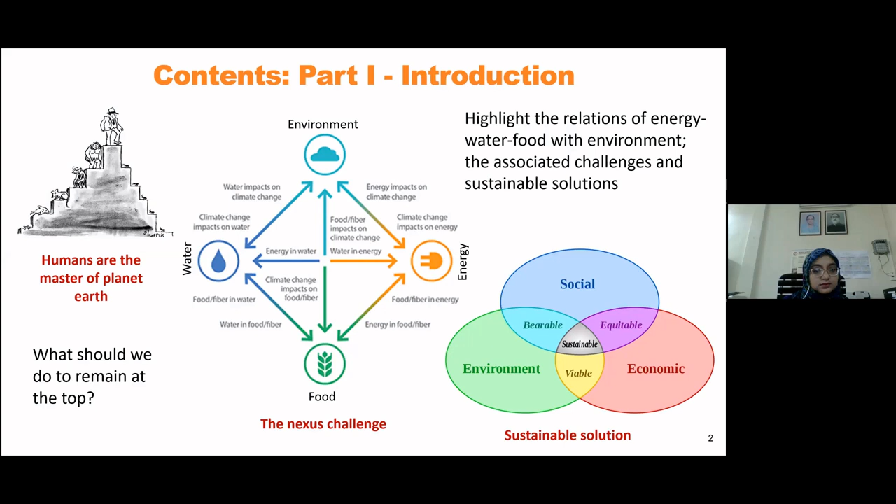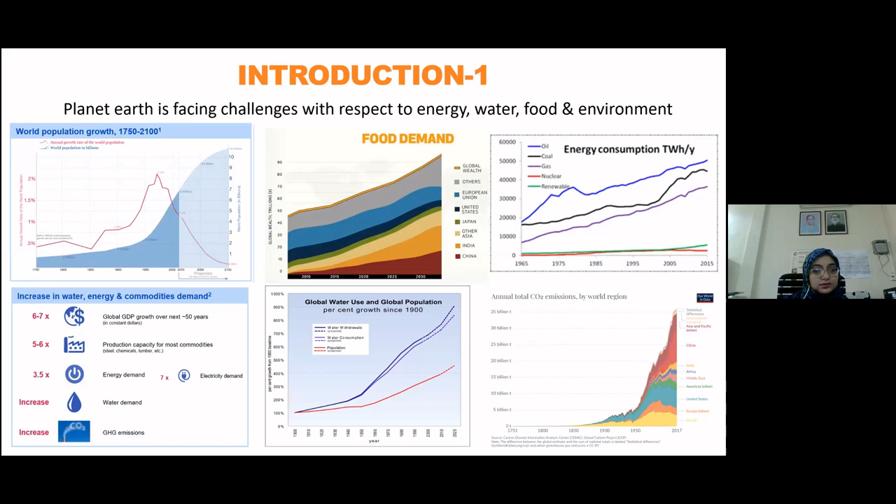But what does this increase of temperature mean? These are all data, not predictions, just raw data collected by different organizations. And the next pictures are real pictures, not manipulated pictures.

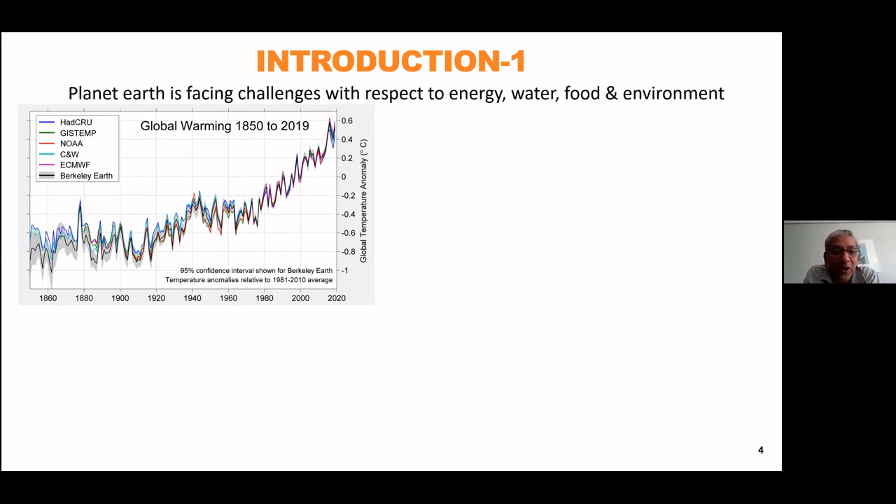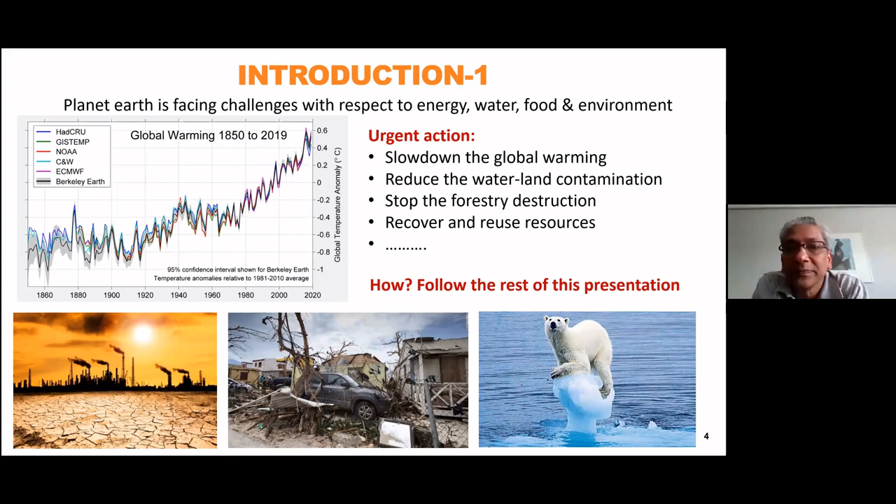The question is how? And if you're interested in this, then the rest of the presentation you can follow, and I will show or discuss how, as chemical engineers, we can contribute to this. So now I will talk briefly about the problem and the analysis.

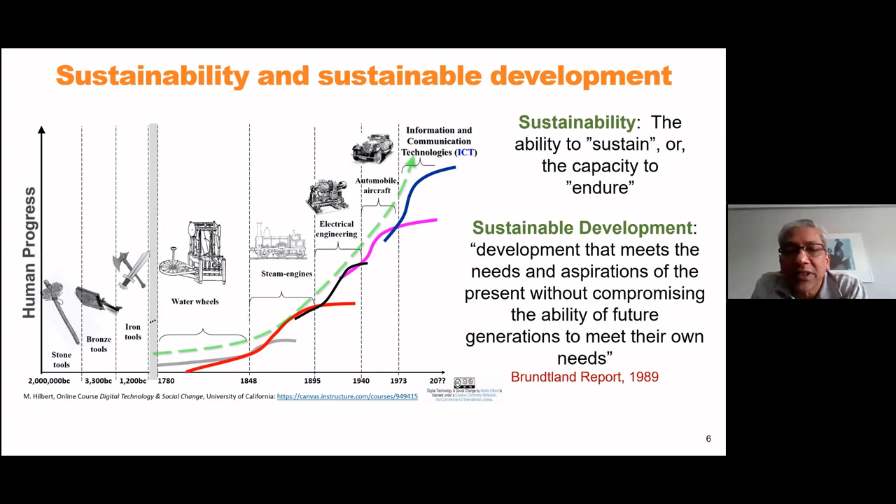But whatever we do, whatever technology we develop, it also has a constraint. This was actually based on a report from the United Nations in 1989, which says: development that meets the needs and aspirations of the present without compromising the ability of future generations to meet their own needs. So we should not just develop technologies, we also have to think of whether that is sustainable with respect to this.

And what I would say is that if one looks at all the developments going on, very few of them, or many of them, do not satisfy that. If you want some examples, you can ask me at the end of the lecture and I will give you examples. So this is something serious because it is there, but why aren't people following it?

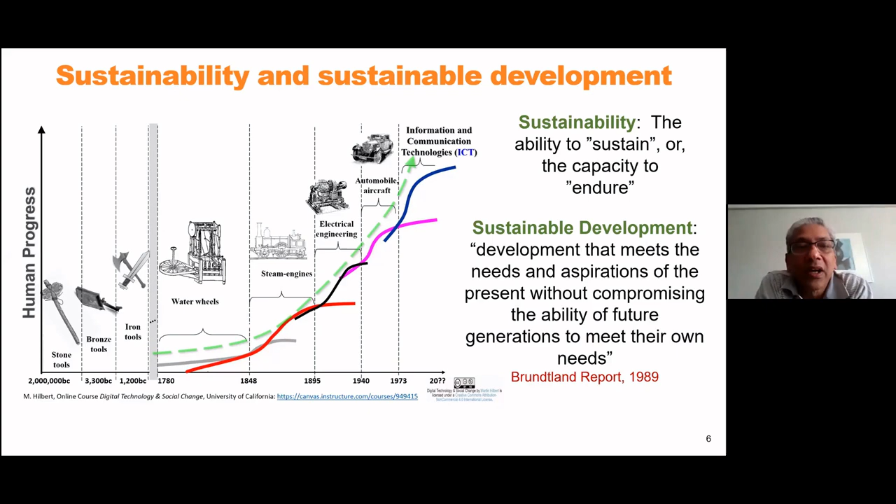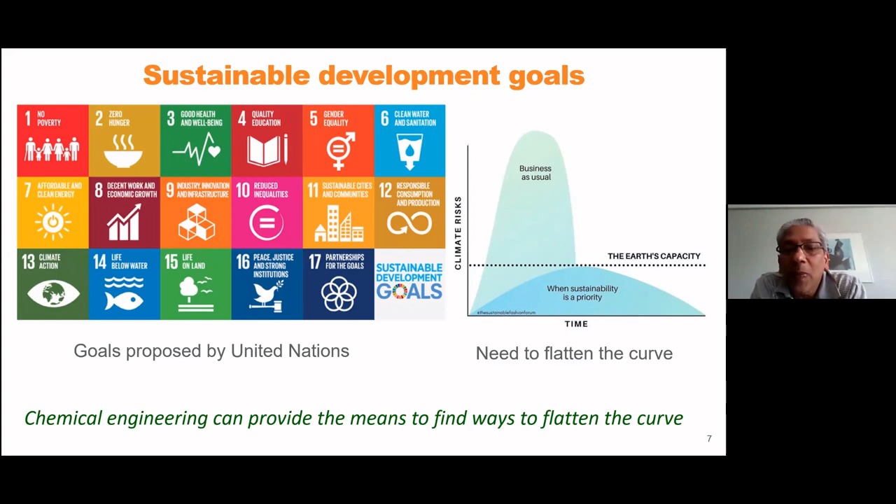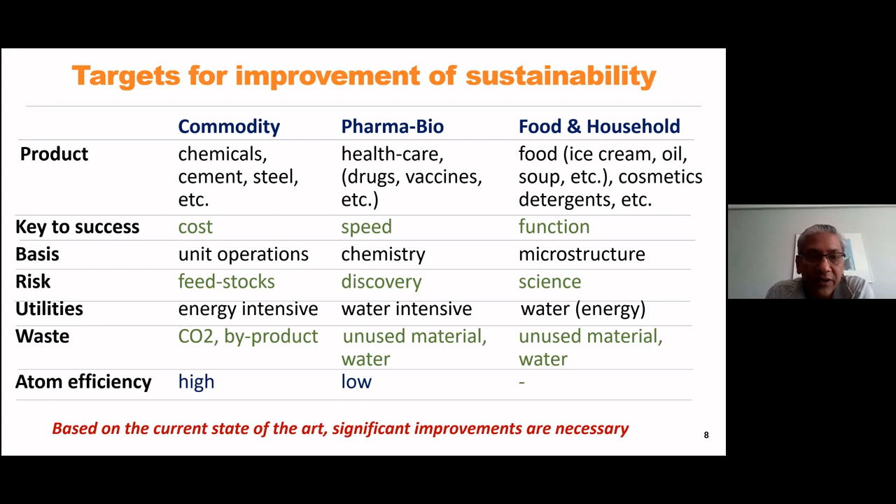Let me now explain a multi-layered view of chemical engineering. At the core, what we say is that chemical engineers, or chemical engineering, is all about converting resources to products that society needs. And a process is a typical process that chemical engineers would design based on the fundamental principles that they would learn.

Like thermodynamics, reactions, separations, transport phenomena, and so on. Based on these fundamental principles, they will design, build, control, operate. But the resource conversion is not 100%, so there will also be wastes. That's the core—every chemical engineer would be expected to know this, but is that enough?

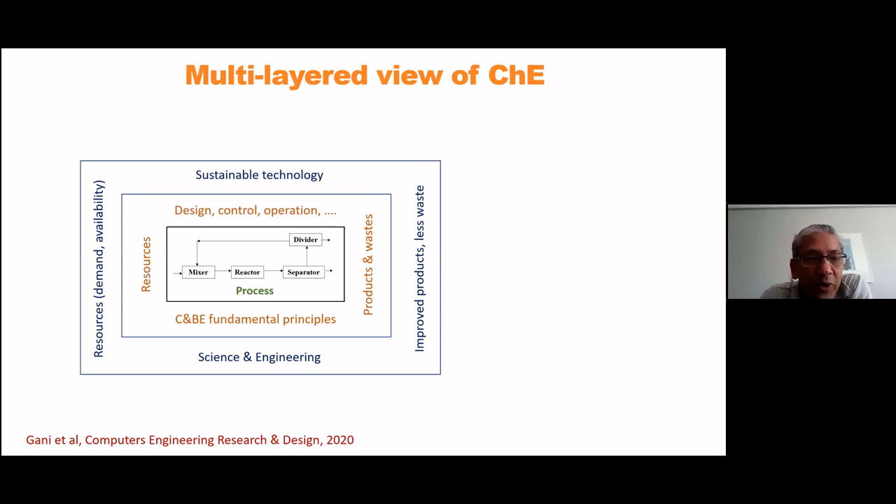That is not really enough, because we are not talking about the availability of the resources. We are not talking about the demand of the resources. And we are not talking about whether the products are improved, whether the waste can be reduced. So if we take all of this into account, we will get a sustainable technology.

To get the sustainable technology, we need more advanced fundamental principles. That's where we need to combine science and engineering. But is that enough? And that's why in the multi-layered view, the final layer is that we want to get the optimal products, the lowest waste, the controlled environmental impact, and so on.

In terms of resources, we need to look at location, type, demand, availability, recovery, and so on. The final result would be a sustained society, sustainable development in terms of industry, institutions like BUET, and all this.

But in order to do this, we need integration of ideas, disciplines, data, and so on. And I think chemical engineering is already built in such a way that we can glue all these disciplines and ideas together to find a solution.

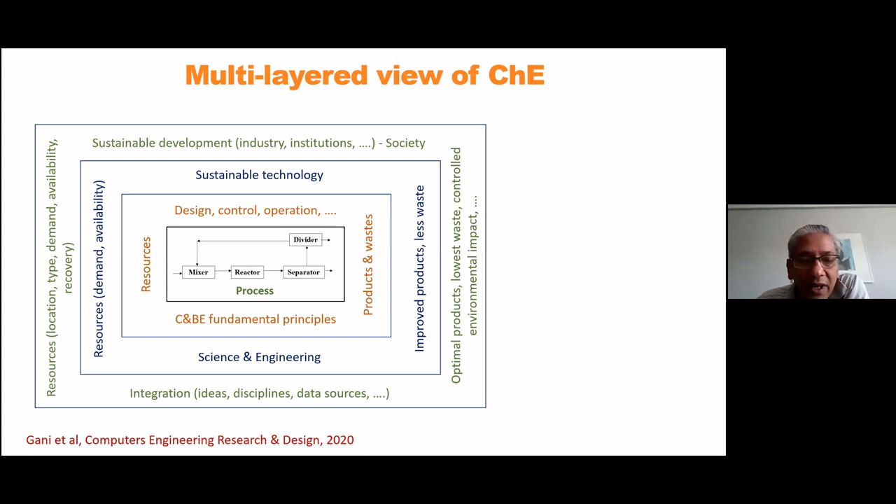If you're interested more in this view of chemical engineering, please look at the publication which came out this year, early this year, in Chemical Engineering Research and Design.

So what would be the contribution of chemical engineering? Problem identification. We can identify the system, which can be process, which can be product, versus their impacts, which resources to use, and so on.

We can evaluate alternatives. Are those alternatives sustainable? Which one to select? This requires development of methods and tools.

In order to do the evaluation of sustainability, we need to calculate the measures of sustainability. We need to do the sustainable process design, the modeling, the database, all of these, and finally mitigation or management.

In addition to management of CO2 emission, water, energy, and so on, I would say that we also have the responsibility to educate and train the general public on the problems that we are facing and how to solve them. And at the same time, if we cannot make the decisions, we need to influence the decision makers, which is very, very important.

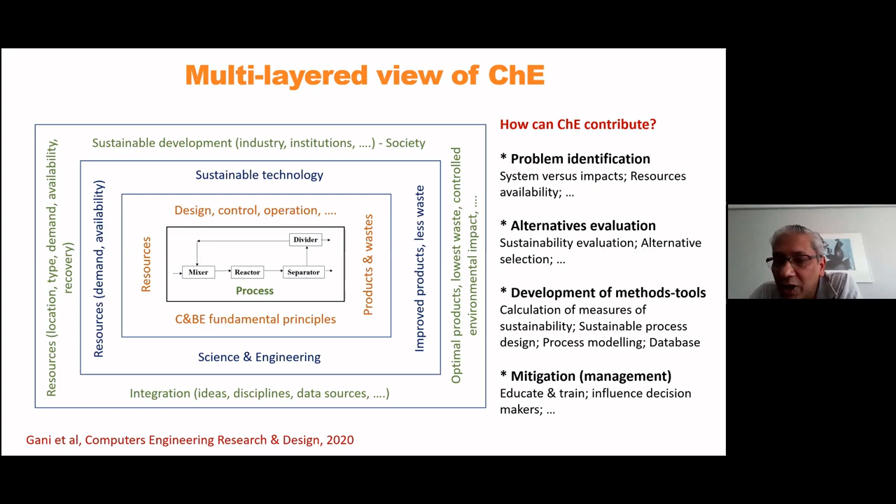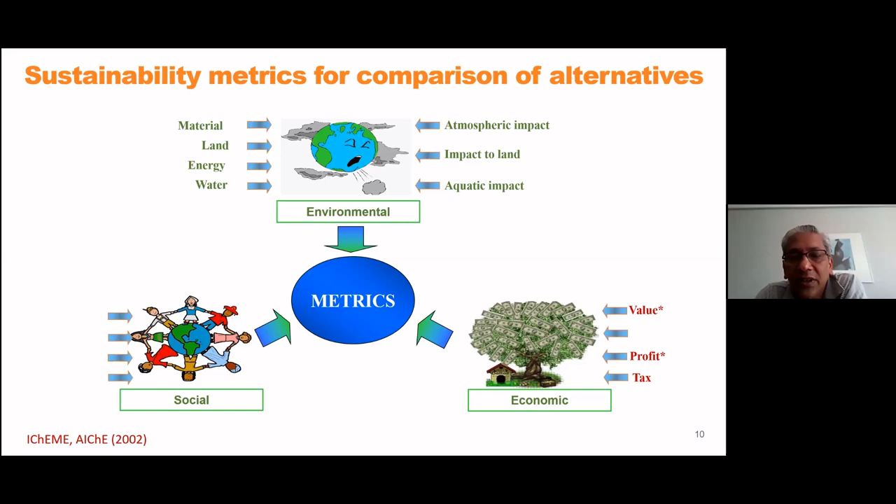How much energy was used or how much water was wasted - those are the measures in terms of environment. In economics, it's clear: profit, tax, value of the product. The societal is more difficult to measure. As a result of the product or process, how many people got jobs, were schools built, were hospitals built, how the quality of life improved - these are social.

So these are numbers that can be calculated with respect to the impact. If they're positive, it is good. If they're negative, it is bad. In terms of material and land usage, if the value is close to 1, it is good, and we should try to keep it as low as possible. But if the value is 0, then there is no process or product, so it has to be usually greater than 0, mostly greater than 1, but it depends on how big the value is.

With respect to profit, of course, the higher it is than 1, the better. So all of these, if we can calculate very quickly, we can identify where the problem is and what can be done about it. Note that sustainability is not an absolute value, it's a reference value. That means we need a reference, and compared to the reference, we see how the new alternative performs.

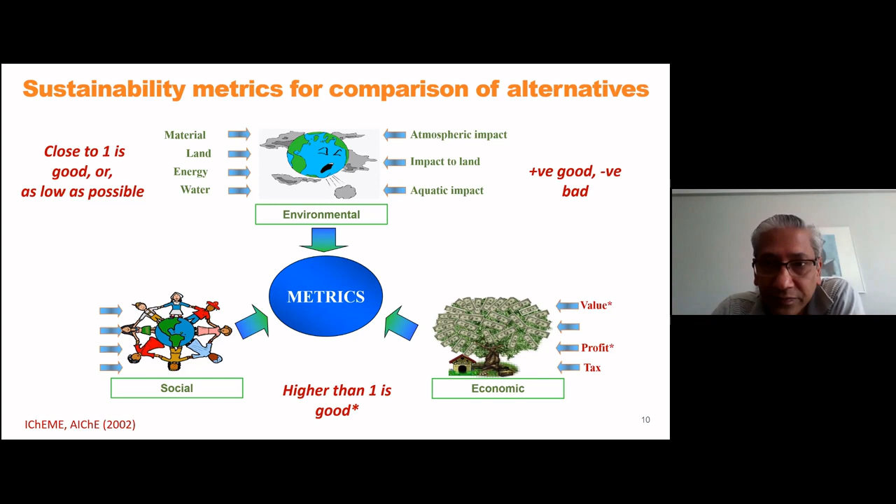Okay, with these, now we can see how do we actually calculate it. This is typical chemical engineering - we have a system with a boundary, and for that system we put in all the input. It's not just material and energy input - we can say data input, money input, people input, all kinds of input, as well as all kinds of output. Because of the knowledge we put in, we get models.

Because of the material we put in, we get product. Because of the energy we put in, we get heating power. Because of the people and money we put in, we get jobs, and so on.

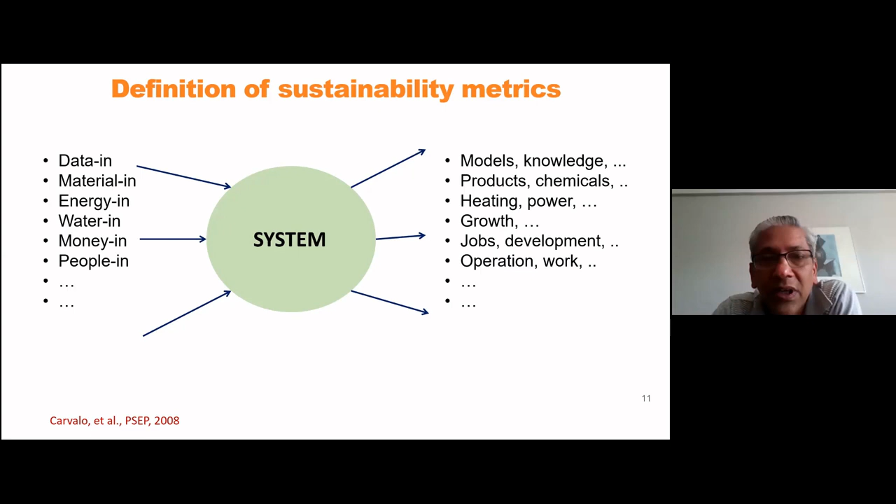So we need to have all the data of what is the input, what is the output, as well as what are the wastes. If we have all this data, we can calculate what we said, the 49 sustainability metrics. S is the sustainability metric, J is the indicator from 1 to 49. If we know the input-output relationship, we can calculate all of them.

In some cases, the input may be 0. In some cases, the output may be 0. In some cases we will use input minus output. In some cases we will use a ratio. So this will give us the metric compared to a reference.

And if you have heard also of carbon footprints, all of these are also calculated based on the available information. Carbon footprint, ecological footprint, hydrogen footprint, nitrogen footprint, water footprint - all kinds of footprints are being proposed. But the most important are the carbon footprint and the ecological footprint.

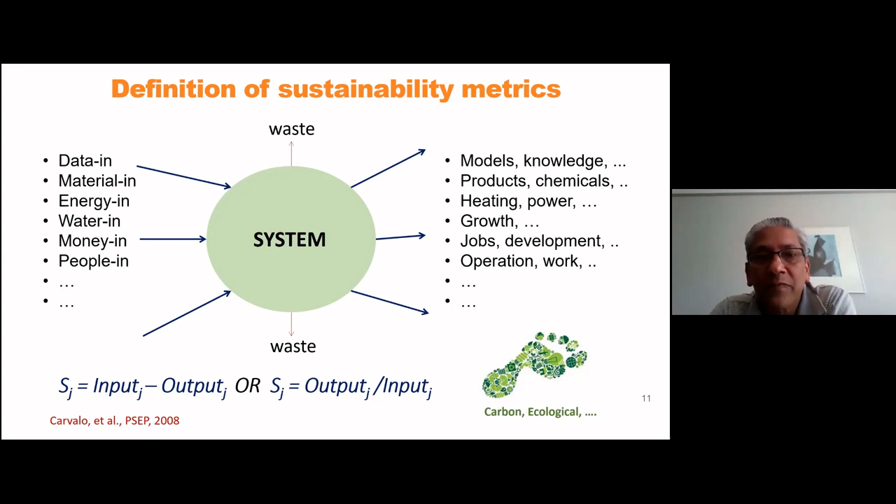So if we know all of these things, then we can make decisions on what to do. So now let's say that we have several alternatives and we need to select one.

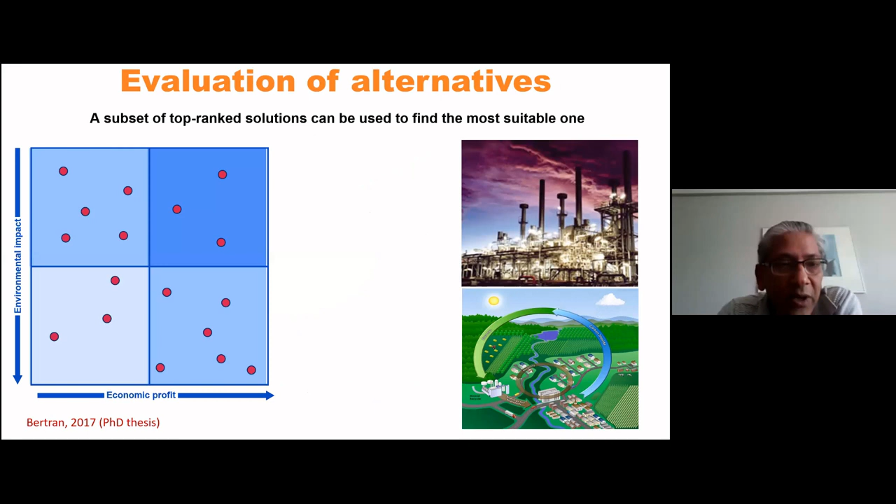I show you on the plot on the left, on the y-axis is the environmental impact, and on the x-axis is the profit, and the different dots are the different alternatives. The bottom left-hand square is low impact, low profit, and the one above is high impact, low profit. The dark blue is high impact, high profit, and the bottom right-hand side is high profit, low impact.

And then we can see that from the sustainable development goals, if we want to reach the one below, the green, this should obviously be the solutions toward the extreme right on the bottom square. And the solutions that we don't want are the ones in the top right.

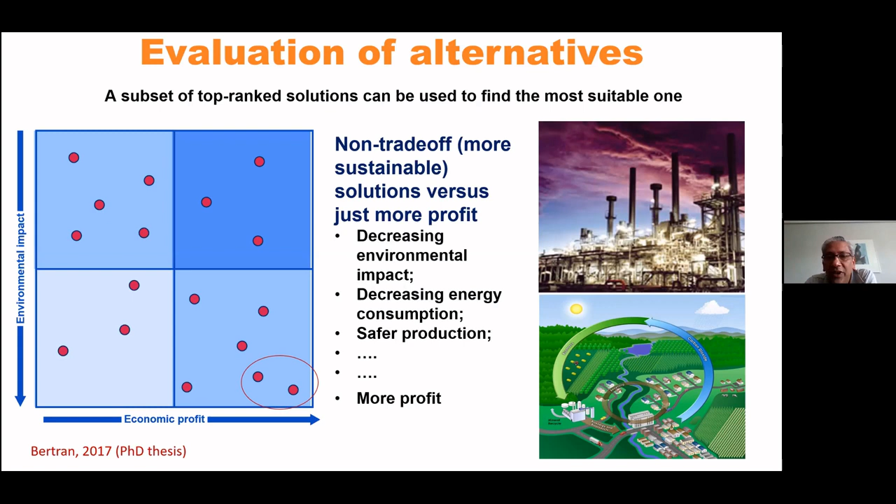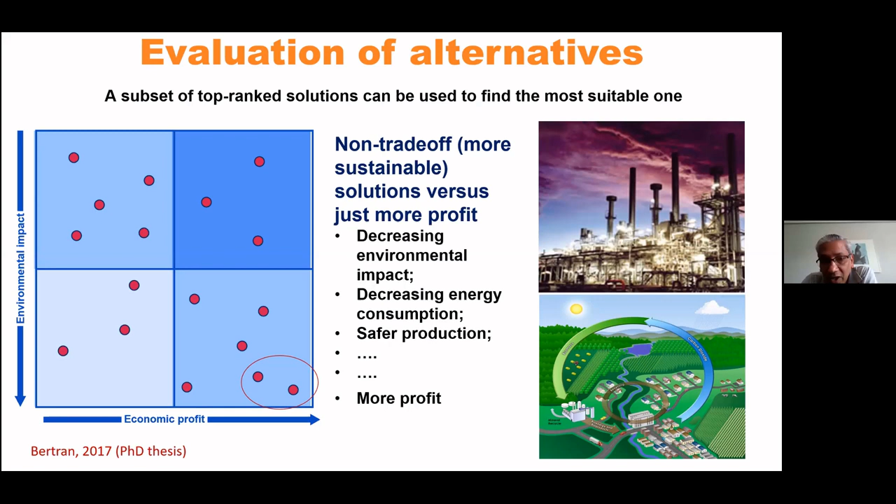So to get the solutions on the bottom right, as I show you here, these ones are non-trade-off solutions. These are more sustainable - they decrease the environmental impact, they decrease the energy consumption, this is safer production, more profit, everything good. If we forget about the environment and just make more profit, we get the solution above. So there's a clear choice of what we want to do.

Also, people say that if we want to make a better environmental solution, we have to pay for it. What I would say is that is not correct, and we can show it here. I think we should always be looking for these kinds of solutions, and should force people to look for these non-trade-off solutions. So let us take three variables: cost, carbon footprint, and waste.

These represent the economics, the environment, and the resources. Obviously, if we reduce the cost, reduce the carbon footprint, reduce the waste, we will improve the profit, we will improve the environmental health, we will improve the resources.

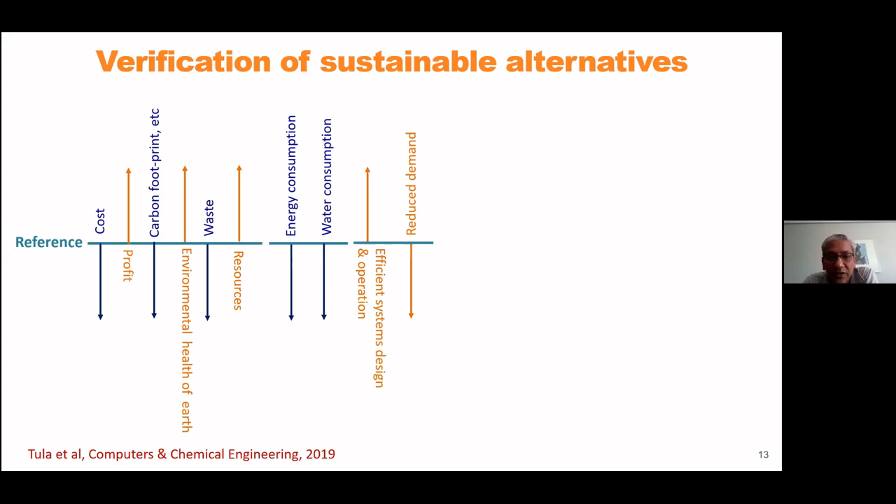How can we do it? By decreasing the energy consumption, by decreasing the water consumption. How do we decrease the water consumption and energy consumption? If we make the process more efficient, if we reduce the demand, better design.

If people say that we have to pay for the environmental improvement, then they're not looking for all the solutions, or they have missed something, because clearly it is possible to find non-trade-off, truly more sustainable solutions. So this is our target. This is what we want to achieve.

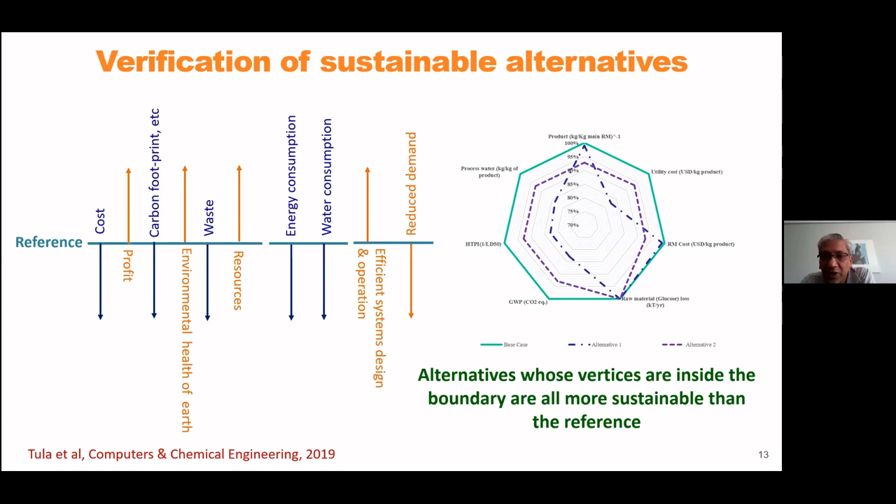We have to decide which raw material to use, which utilities to use, which product to make, how many processing steps. So what we can say is that as engineers, we have to make decisions, and based on those decisions, we will calculate things. And those things that we will calculate will impact the environment and our future. So it is important that we know how to make the decisions, and know how to interpret the results.

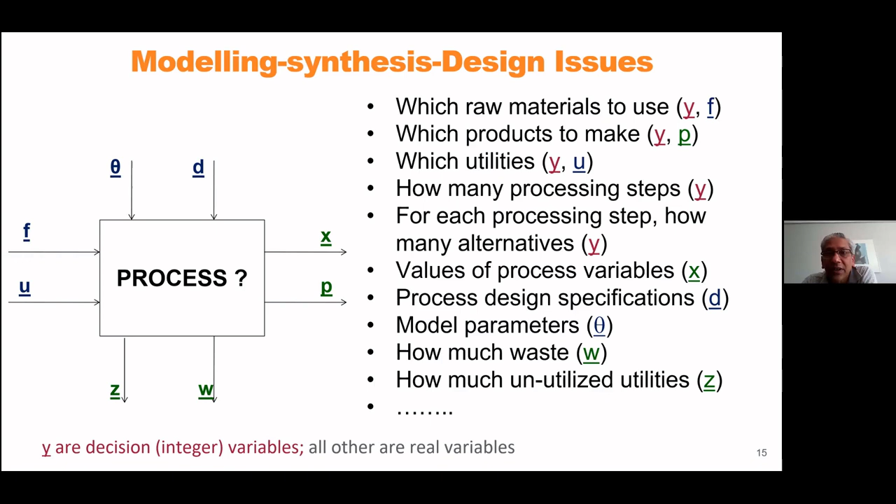Okay, how do we make the decisions? We need to understand the relationship between the product and the process. As we said before, to sustain ourselves on planet Earth, we need to continuously improve the products that we are making from the resources that are on Earth.

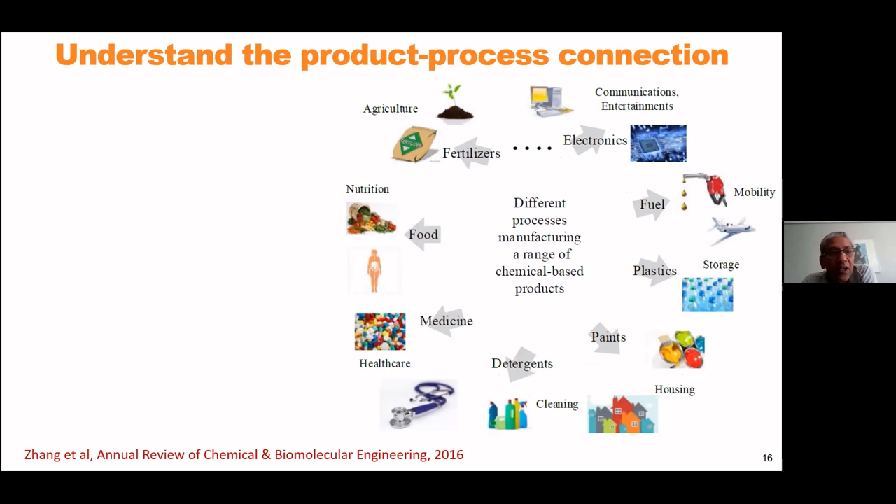If you look at the current state of the art, we are making useful products from the resources that we have, but we need to define the product to make. We need to identify the raw material to use. We need to identify the process that can manufacture the product in a sustainable manner.

But here also, I would like to point out the issue between prevention and cure. What I mean by prevention is that prevention can be done through technical solutions. For example, we are designing a process. If we choose the right chemicals, the right solvents, the right energy, we are not going to have a problem.

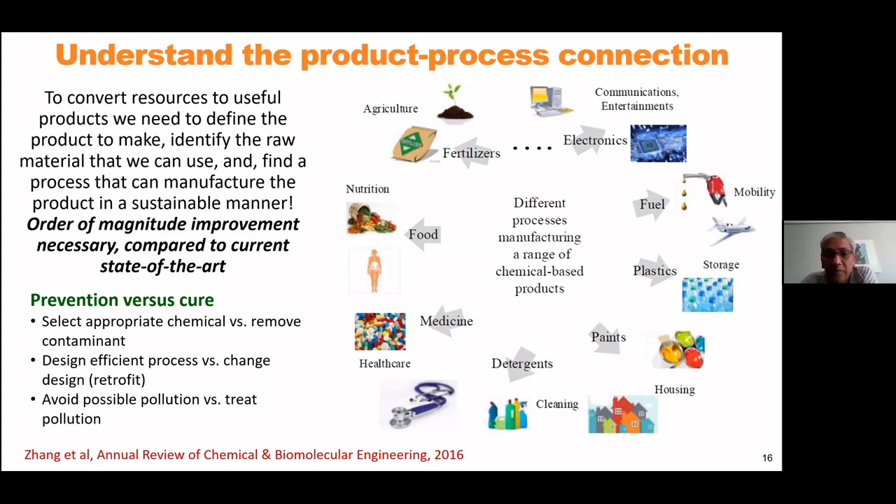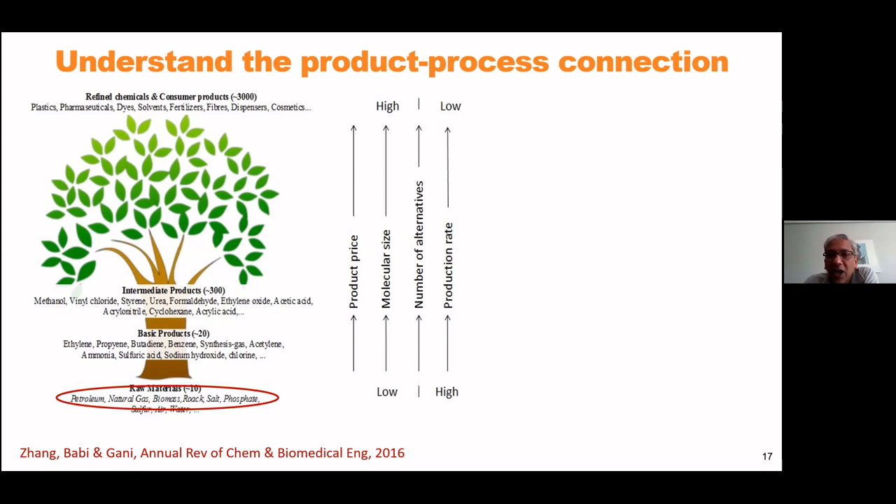If you want to learn more about it, it's given in this paper. So I will skip that and point out that these are the questions we need to answer: what, why, when, and how. How is related to the process. What, why, when is related to the product, the raw material, and so on.

And then one could question, why do we use fossil fuel and not solar energy? Or why do we use coal and not solar energy? Which minerals do we use? Which metals do we use? And so on. So we will discuss this also, but there is a clear decision that needs to be made, which is the best decision related to what to make, why to make, when to make, and how to make.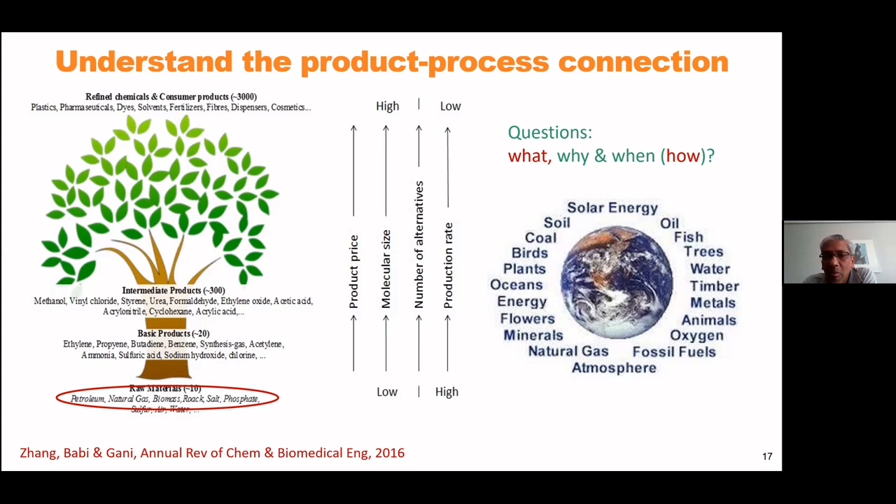Okay, let's look at more detail now. Let's say that our core topic of chemical engineering is to convert resources to product. I'm just showing the core level, but actually it should cover all three. And we can decide on the raw material, the products, and the process through the tree.

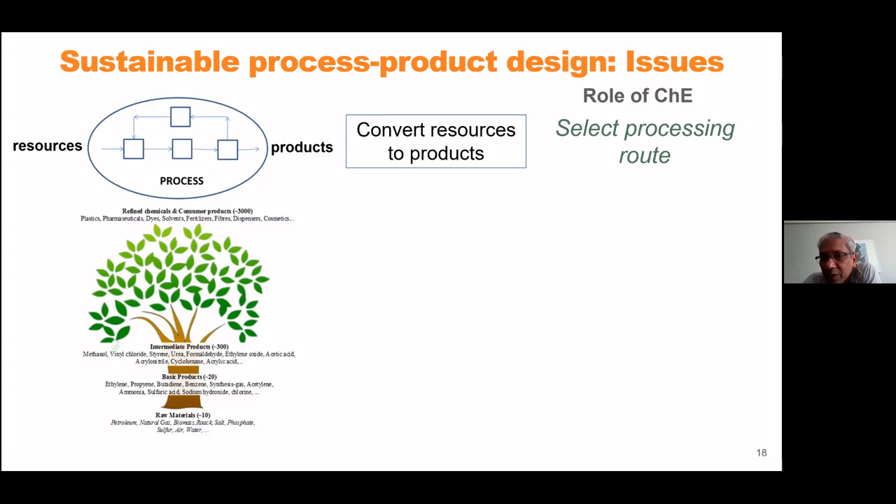So the first thing is that we want to convert resources to products. We need to select a processing route. Once we have done that, in order to produce the product from the resources, we need to use energy, water, solvents, and others. So we need to design, simulate, operate the process.

As a result of doing this, we are going to impact the environment because we are using energy, solvent, and water. So what are those impacts? We need to calculate them. And based on those calculations, we need to set targets: if this value is greater than this, it is not acceptable, these values must be lower than this. Then based on those targets, we need to change the design so that we can find alternatives that will match the targets. If the targets are matched, we have a more sustainable solution.

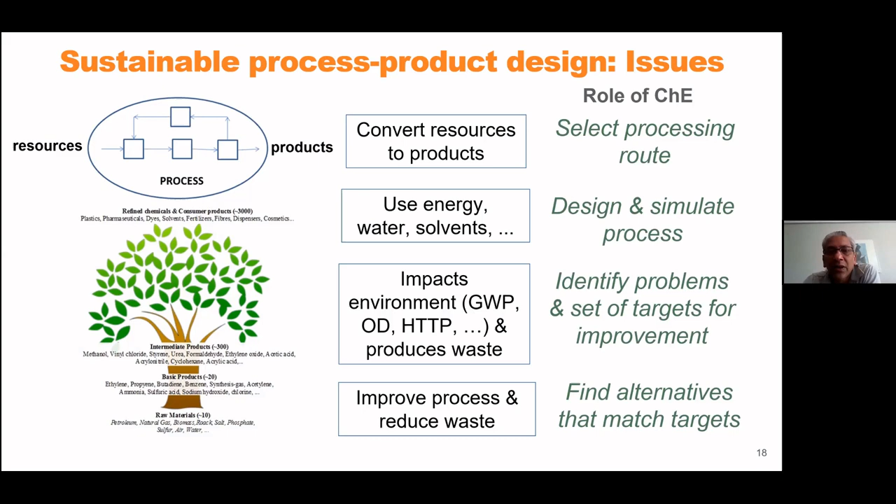So these are the basic functions, not just at the core level, but at all three levels. So now, based on this as the background, let us look at some examples of sustainable alternative developments.

Does that satisfy the requirement of the United Nations from 1987, that we must not do anything now that will affect our future generations? It may not affect our immediate future generation, but some future generation will be affected because all this will have to come out. So I'm not sure that I would accept that CCS should be there.

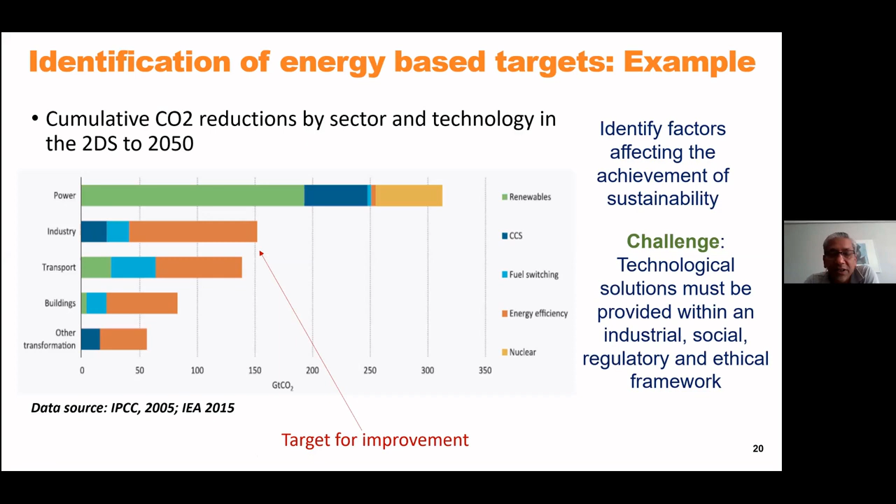Okay, now one of the ways to achieve this significant improvement in energy efficiency, one technology has been pointed out, which is process intensification, that it can actually significantly improve the energy or material usage.

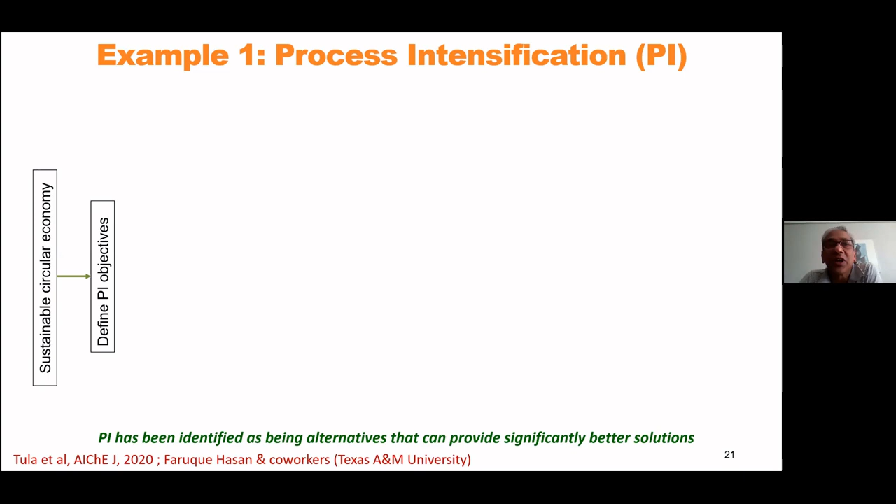So if we say that the objective of process intensification is sustainable circular economy - not just circular economy, because circular economy cannot satisfy the laws of thermodynamics. Maybe money can satisfy the circular economy, but not the material, not the energy. So it has to be sustainable circular economy. So how do we achieve the improvements?

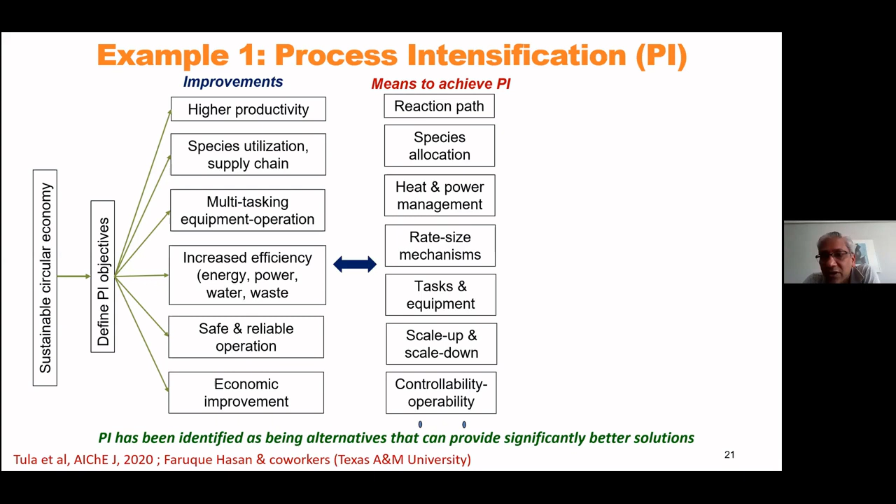Any of those improvements - higher productivity, multitasking, increased efficiency, safety, reliability - one or a combination of all of these will help us achieve the improvement we need for a sustainable circular economy. How do we get it? These are classical chemical engineering principles, not only at the core but at higher levels also: reaction path, species allocation, heat and power management, rate and size mechanisms, scale up, scale down. It's not just about minimizing size, but also increasing size, controllability, operability, and so on. The result of this is a new unit operation, a totally new process, a totally new network of processes. All of these will significantly improve on the current state of the art. A note here is that we are talking about new equipment, so we have to forget the old unit operation.

So Process Intensification, or PI, has been identified as an alternative that can provide significantly better solutions. I would like to highlight one of BUET Chemical Engineering's graduates, Faruque Hasan. He is now an associate professor at Texas A&M University, and he's becoming a world expert on process intensification. Very good work.

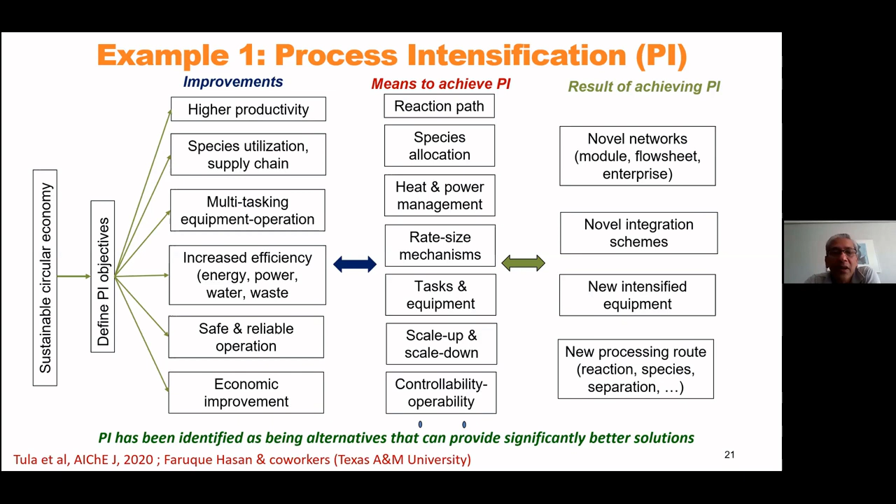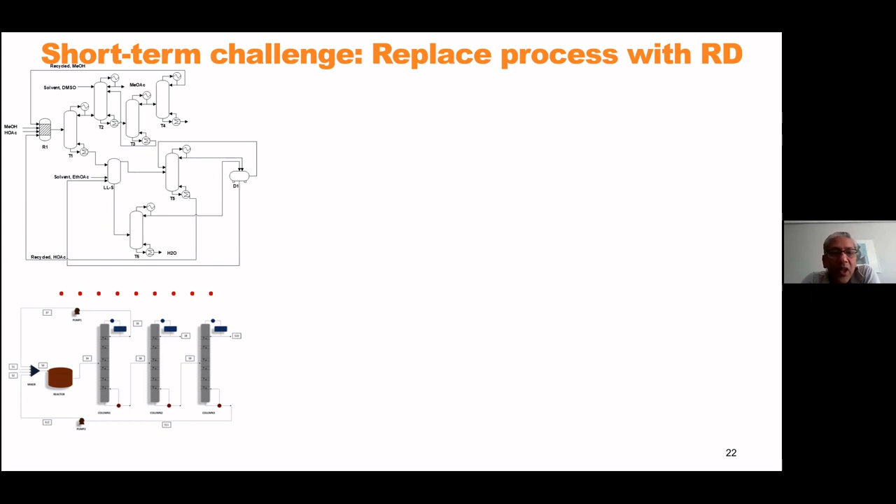So just to show you an example, what you see on the left-hand side are two flow sheets of chemical processes. We have a reactor followed by separation, and these are vapor-liquid separations. In principle, any process with a reactor followed by separations can be converted into a reactive distillation. This is a PI solution that is guaranteed to give the same product as the original process, with significant improvement in reduction of energy, material, and so on.

So if this was such a magic solution, why isn't industry using it? Only a few examples can be seen, because they are still not sure that this will really work. Too good to be true, maybe. But that's where we come in again - we have to influence the decision makers to convince them that this really is the solution.

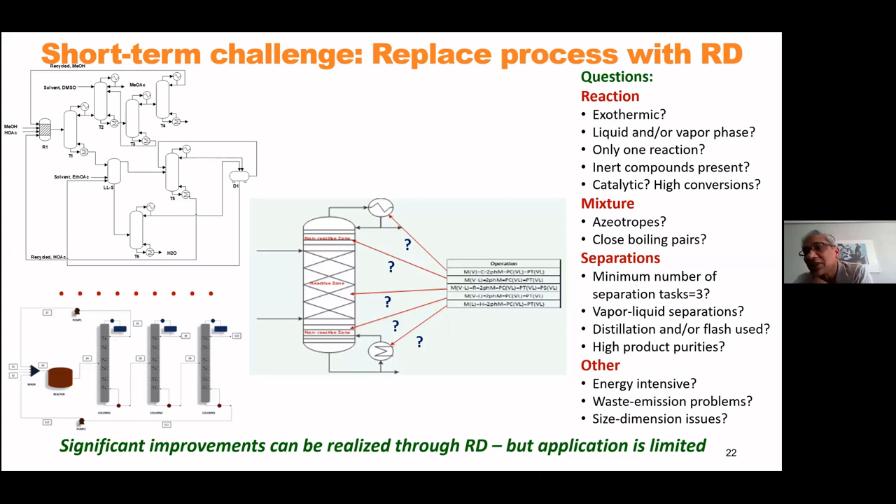With that design, we can replace an entire chemical process. Now, can you imagine the thousands of chemical processes that could be converted this way? That would make a significant improvement if we can convince the decision makers that this is a good idea. And to do that, we need more work - for example, work to prove that the design will actually work, is controllable, is operable, and requires less energy. I'm happy to report that we have been collaborating with the PSE group faculty at the BUET Chemical Engineering Department, and also with international partners from Korea, China, Thailand, and Denmark. And now we can show clearly that reactive distillation can be designed in such a way that it would be best to operate, best to control, much better than the original. So improvement can be made.

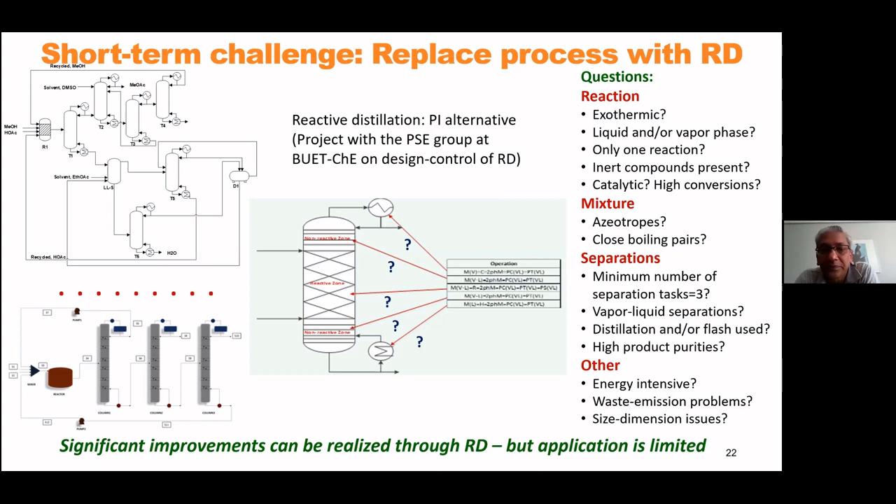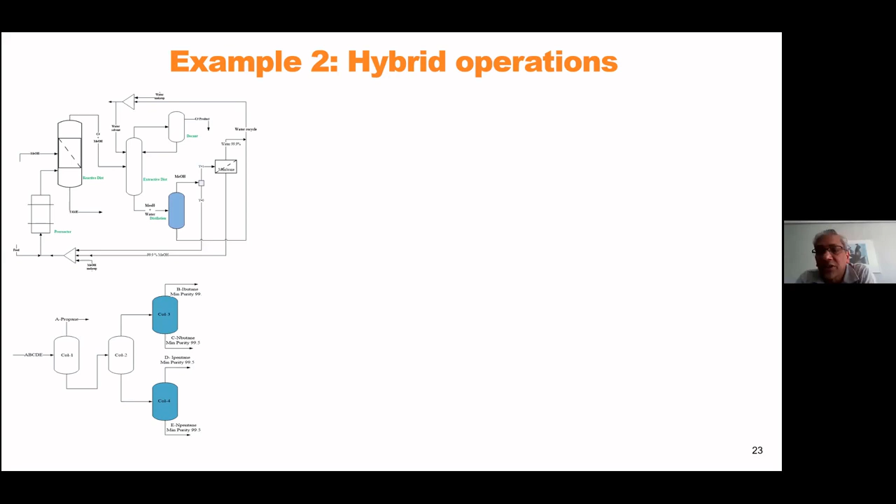But for the last small amount of purity, it uses 80% of the total energy, and that cannot be very good. So can we replace this final separation with something else that does not require so much energy?

And the solution is a hybrid. We operate the same distillation column, no changes, we just reduce the reflux. We get a less pure product, but it uses only 10 to 20% of the original energy. Then we put a membrane, if we can find a membrane material, to do the final separation by removing the small percentage of impurity that is there. It's not going to remove the high purity product, it will remove the low impurities, and by removing the impurities we get the more pure product. This requires hardly any energy, and we can find many examples of currently operating distillation columns that can be replaced with this hybrid, with significant improvement in energy.

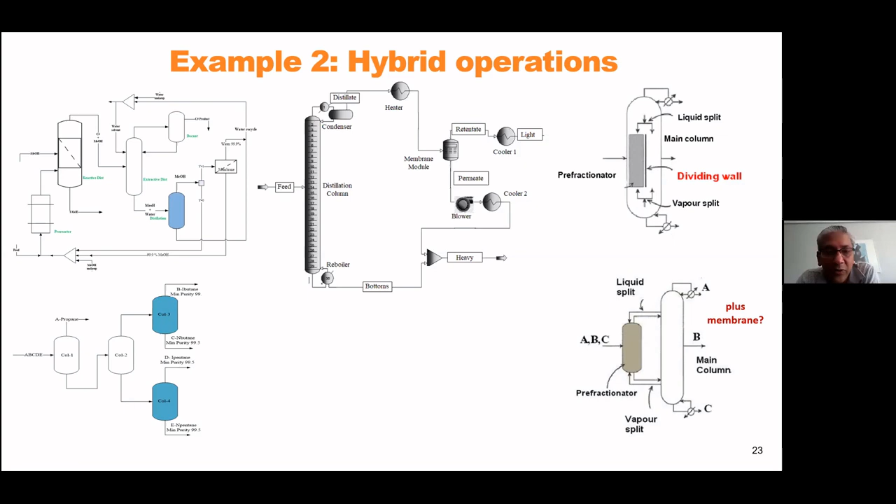We can also combine two or even three distillation columns together into these kinds of combinations, putting a membrane also where needed. So the rule is: combine two types of techniques such that each operates at its highest efficiency, saving 10 to 50% of the energy consumed by a single unit. There are at least 100,000 operating distillation columns on Earth - opportunities are there to make an impact. So again, we have made more progress here, and some companies are beginning to listen and would like to find more details on how to add the membrane unit or other adsorption or other techniques.

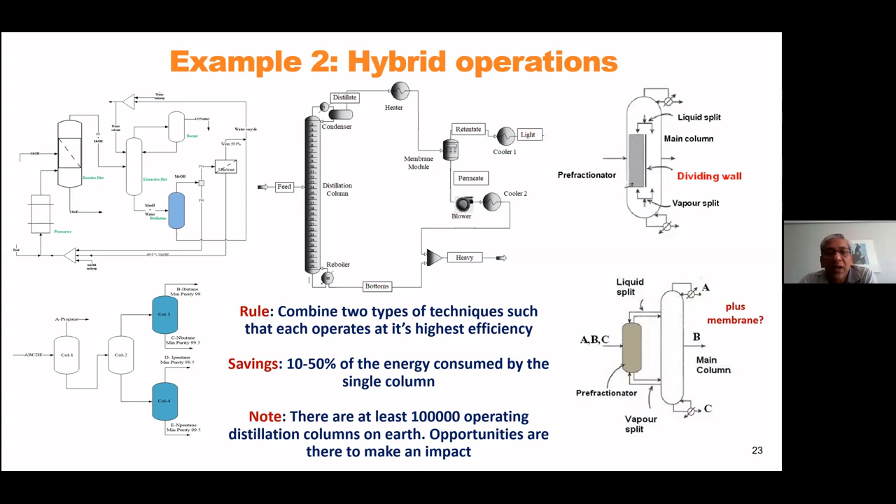Another approach is the integrated network. Here we have the manufacturing process, which is designed to minimize everything.

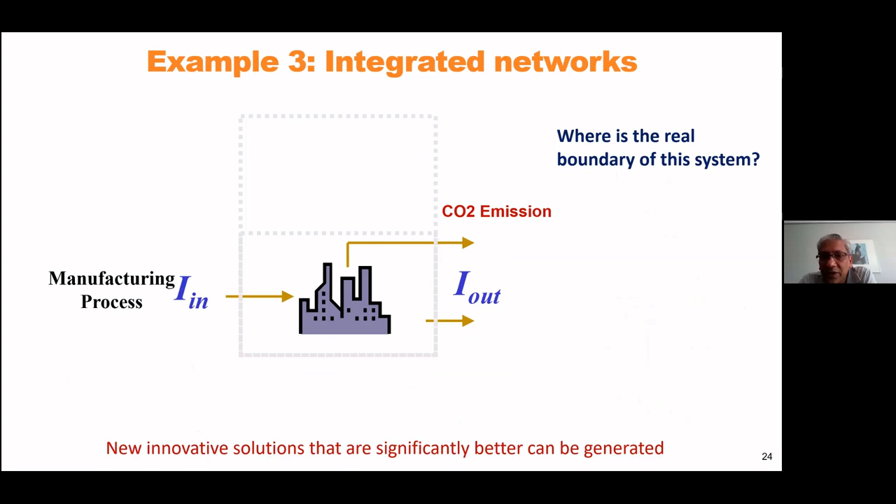Zero CO2 emission is the goal, but where is the actual boundary? Is the boundary just the process, or does the boundary include the power plant that provides the power?

Should the power plant use fossil fuel or other sources of energy like solar, wind, or nuclear? If we combine all of this together and solve a bigger problem, we could find solutions that achieve zero CO2 emission.

We also have to recognize that there are energy-demanding processes, like the manufacturing process, and energy-supplying technologies, like the power plant.

So we have to combine them in such a way that we get a zero emission solution. If we don't do that, the solutions will be superficial and not very useful.

What we need are new, innovative solutions that are significantly better, solutions that can reduce the energy demand of the process in order to reduce CO2 emission.

At the same time, we won't use fossil fuel for the power plant, but instead use solar, wind, or nuclear power, so that we don't get CO2 emission in the first place.

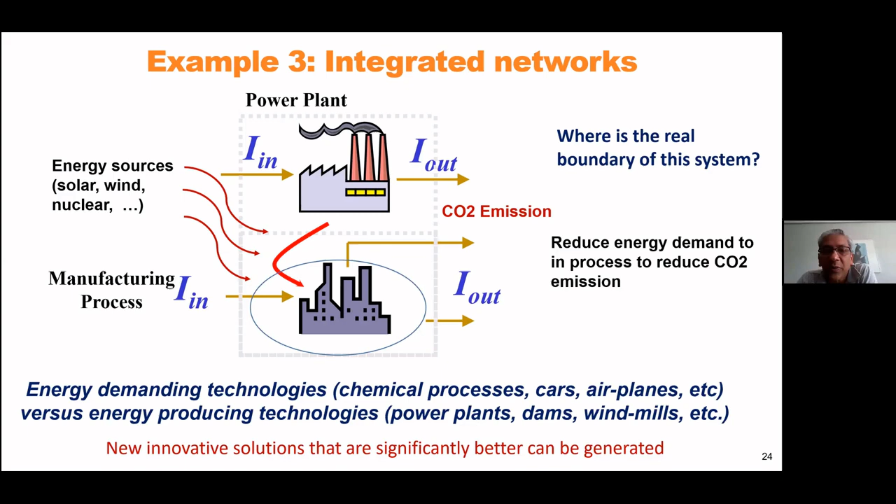And whatever CO2 is emitted, we will capture and use it in the process to manufacture something else. Is that possible? Let's look at this kind of problem formulation.

So here is the process. We look at all combinations of the process network to find the best process, assuming that whatever water we need is available, and whatever electricity or energy we need is also available.

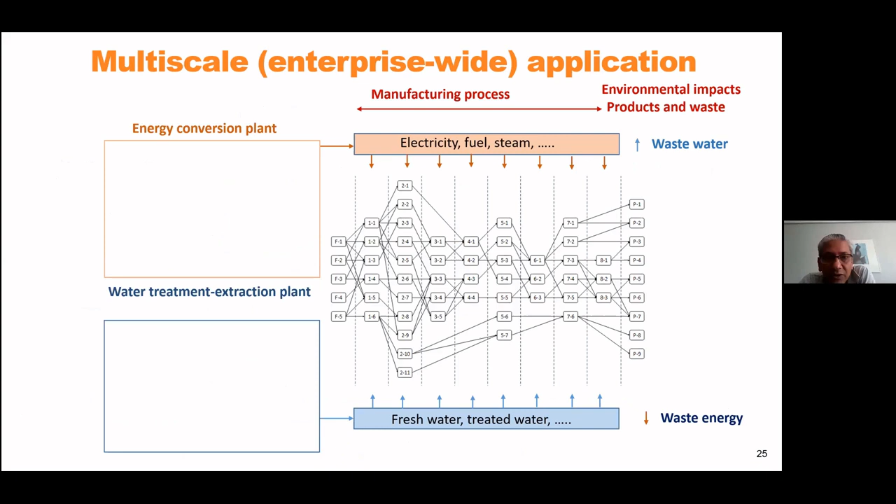We minimize the waste of water and energy, but we are assuming that all the energy we need is available, and all the water we need is available.

That's the typical problem we solve. But now we put an availability limit on any type of energy we use, saying only so much is available.

Then our solution will be different. We can tackle that, but then we could also ask how we will convert the energy source into the energy supply we need. We will optimize that too.

So what would be the power plant? What would be the solar energy conversion, oil energy conversion, and so on? And whatever CO2 is generated, we will use it within the process.

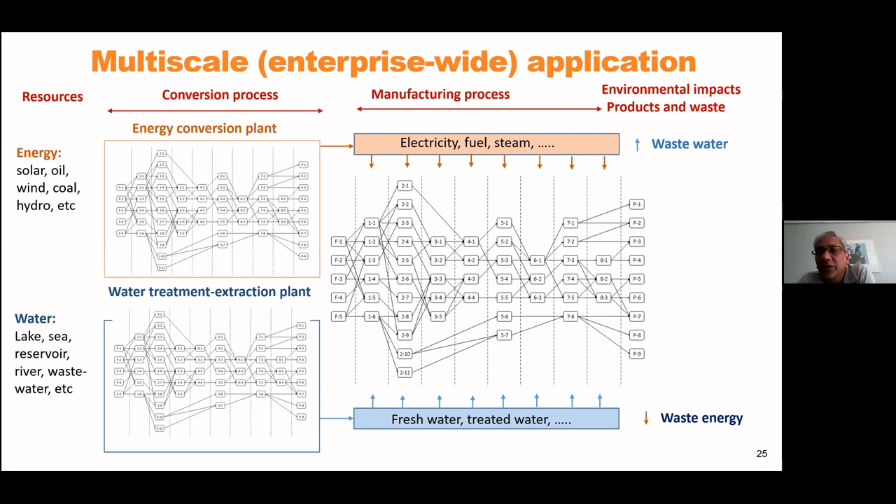Similarly with water, we will recycle it so that fresh water use is reduced. And this would be the solution that we are looking for.

Can it be solved? It sounds very difficult, but actually I just got information last night that our paper giving an example of this, based in China, has been accepted.

In this paper, we give the design of a process, the design of the power plant, and the design of the energy conversion and water conversion. All together, we show a zero environmental impact solution. So these things are possible.

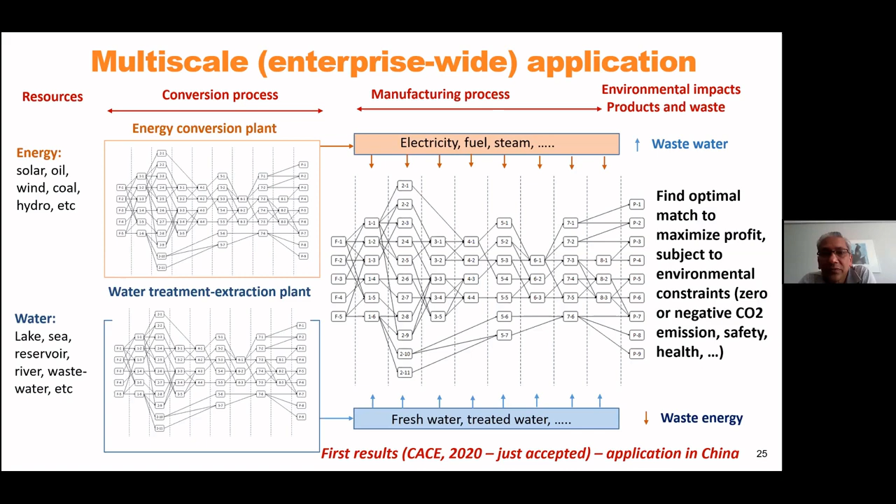Finally, the last example is not with respect to the process, but with respect to the product. We call it chemical substitution, and the idea is that chemicals can cause problems if they go out.

This happens in cases like automobiles, agrochemicals, process solvents, paints, and cosmetics. They can cause environmental hazard, human health hazard, and operational problems due to regulations within Europe and within the USA.

So we cannot just choose any chemical. If we find a chemical that is causing a problem, we have to replace it.

So the steps would be: identify the contaminant, identify the function that the contaminant was performing, find an alternative chemical that has all the good properties but not the bad ones, verify the function, and confirm the improved sustainability.

This is a problem that exists everywhere, and I'm sure there are many problems like this in Bangladesh where this approach can be applied. So what could be the solution?

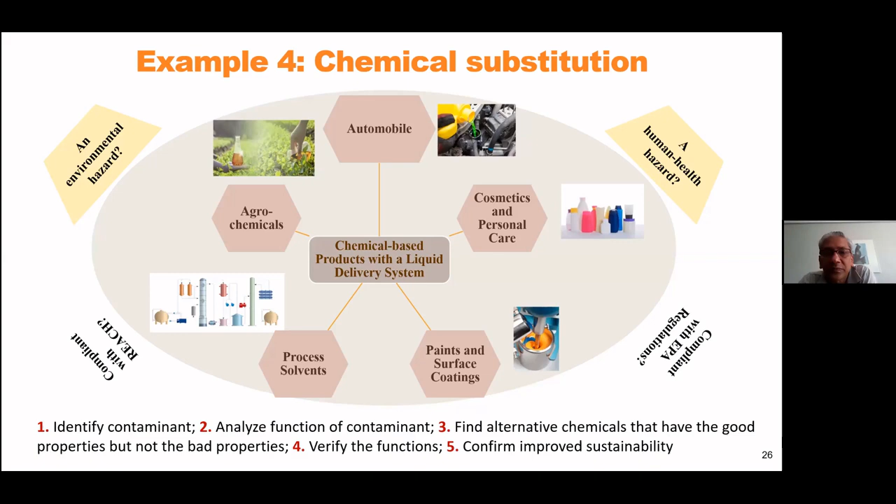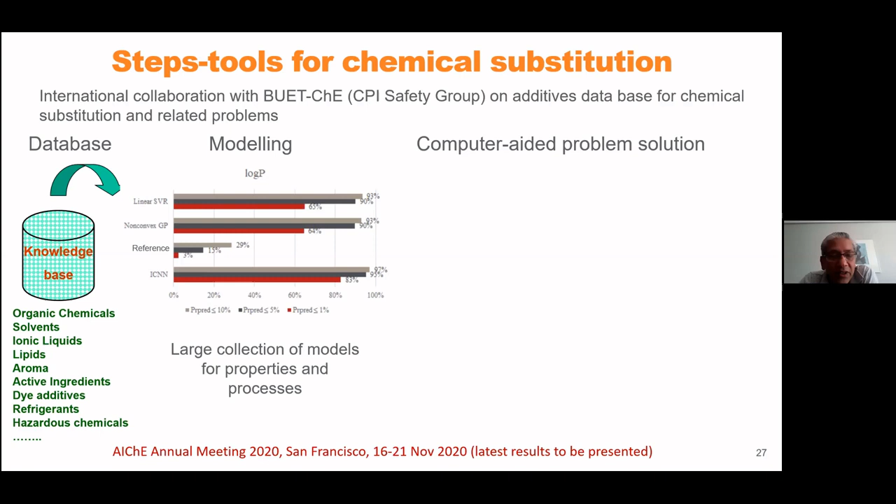In order to develop the solution, we need to create a database of chemicals, all kinds of chemicals. Because the database won't have all the properties we need, we have to develop models for those properties.

Then we need to develop a computer-aided framework that tells us, step by step, what the calculations would be, including the experiments that would be required.

Here too, I'm happy to say we are collaborating with the CPI Safety Group at BUET Chemical Engineering on developing an additives database for chemical substitution.

And the results are going to be presented at the AIChE annual meeting this year in San Francisco, most likely as an online presentation, and afterward as a paper.

Just to give you some numbers: the database, when we started, had about 12,000 compounds. Now we have managed to collect around 75,000 chemicals, for which we have information. Wherever there is a gap, we are developing models to give us that missing information, and these models have been improved significantly. If you look at the second lowest, that is the reference model, and all the others are the new models with significant improvements.

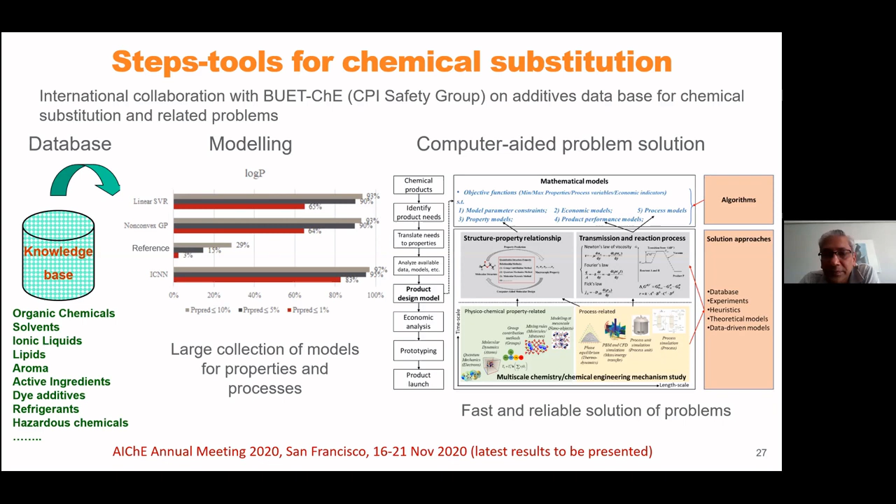So based on these examples, what are the perspectives and conclusions? I would take this statement from Adisa Azapagic, a sustainability expert in Europe: turning these challenges into opportunities. We have all these challenges, and we have the opportunity to develop new technologies that will take care of this.

One thing we can highlight here is that resources on Earth are not uniformly distributed. We know that - whether it is water, energy, or minerals, they are not uniformly distributed. If we take the case of energy, we have fossil fuel as one source, and we have solar energy as another. But we are mainly using fossil fuel because it is cheap and we have a technology that works. But it is also causing global greenhouse gas emissions and global warming. We need to increase the use of resources like solar energy that are more expensive now but do not cause this problem.

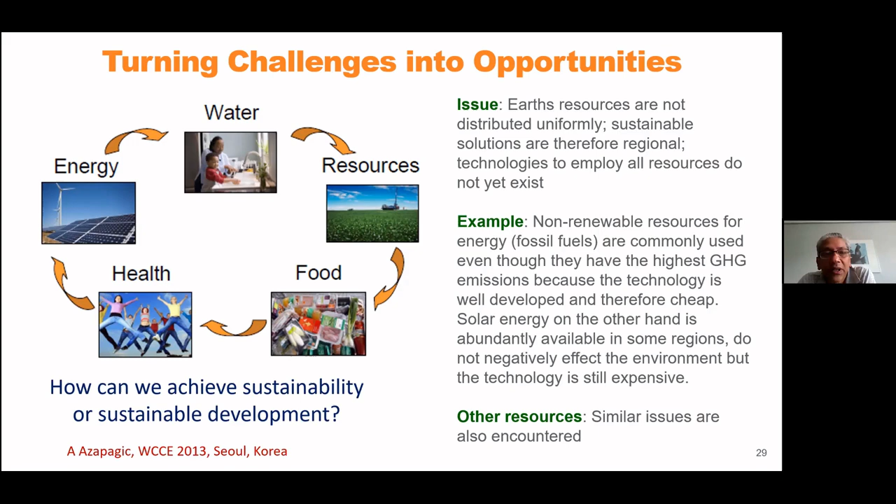Another example: find new and novel solutions to old problems. Plastic waste is a big problem now - everybody agrees we have to reduce the use of plastic and find ways to convert it. Coconut leaf can actually make a straw. Should we use a plastic straw, or this kind of straw? I don't drink anywhere if somebody gives me a plastic straw - I use glass, or I sometimes carry my own straw. We should not use plastic straws. Same with packaging - maybe we should take over the world again with jute, because why use plastic when jute is there?

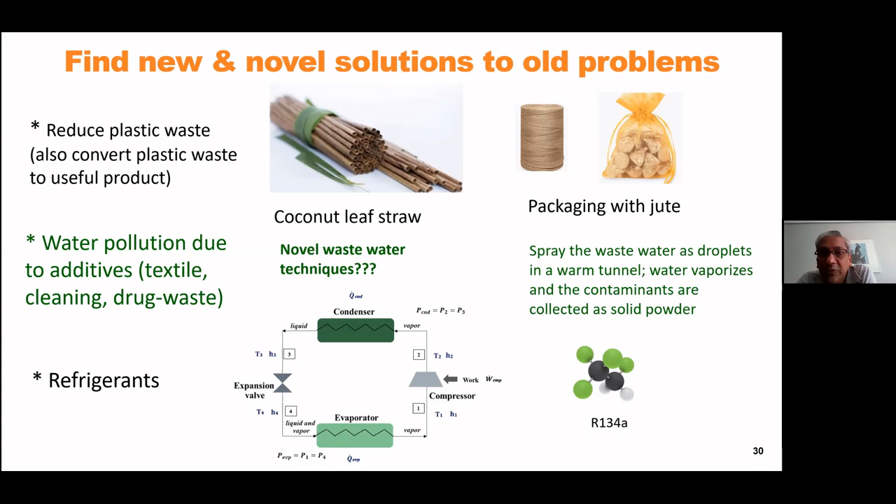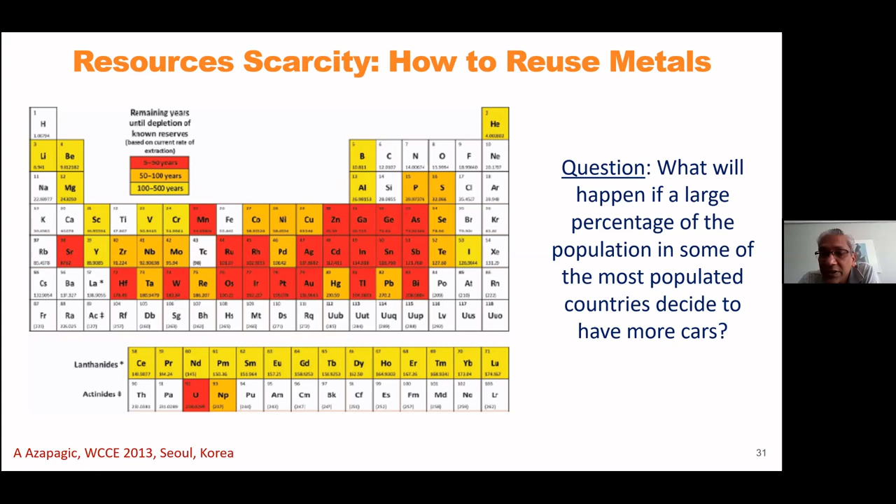So finally, let's say what is the role of chemical engineers. Chemical engineering and related science and techniques must play a key role in meeting future societal needs, as well as all the things we are supposed to do. These are in addition: promote research and development as a fundamental pillar and encourage technology development to achieve a planet able to sustain a growing population while improving quality of life.

Facilitate global dissemination of chemical engineering technical knowledge and industrial best practices worldwide. Promote conservation and care of global resources, health, safety, and conduct for chemical engineers worldwide, and safeguard the public, as well as influence decision makers. Finally, with respect to the pandemic or disasters that can occur, prepare with methods and tools that can contribute to quick problem resolution, so as to contribute to achieving sustainable development.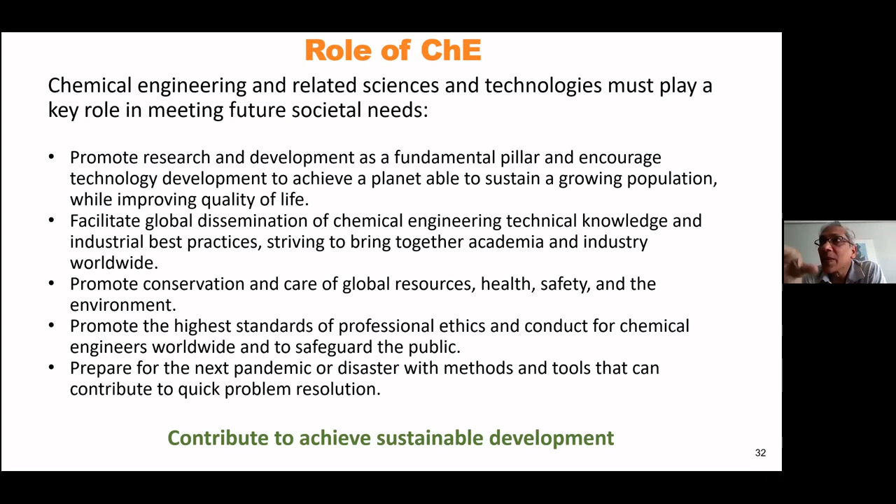I know a good friend of mine who lives in Holland. He and his friends in that area have all converted to solar, but they're connected to a power grid. And the way it works is that the power grid with the computer and everything figures out how much each house needs. If the solar energy is not enough, they will give the fossil energy. If the solar energy is enough, they will have the solar energy. And if they're producing more solar energy than they need, that will go to the grid. And then what they found out was that initially they had to invest, but now actually they're making money. So the technology is improving, and a lot of improvement is necessary.

This is the free energy. So if we can find it - but the problem again would be material. There is so much solar energy, which is something. In 75 minutes, you get the total energy requirement of the whole Earth per year. But again, if 1 billion people use solar energy, will the material that is needed for solar energy be enough? Then the question of material will come. Yes, so that is a big issue. The supply chain is a big problem.

The last point I want to make is about nuclear energy. Is nuclear energy for a country like Bangladesh? No, because it has so much high density population, and there will be accidents, small or big. For a country like Bangladesh, we just cannot have nuclear energy. I'm not promoting that, I'm just saying that.